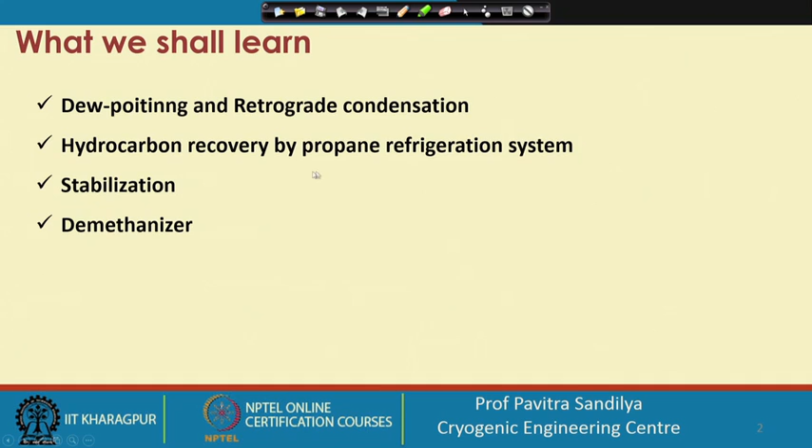Welcome. After learning about liquefaction and refrigeration, now we go on to learn the applications of these processes for natural gas processing. In this lecture, we shall be looking at the hydrocarbon recovery in natural gas systems. We shall be learning about dew pointing, hydrocarbon recovery by propane refrigeration, stabilization and the demethanizer.

So, let us first see why we need this recovery of the hydrocarbons. We know that the pipeline grade natural gas, the sale gas, has to meet some stipulated heating value, and it has been found that without dilution by nitrogen or carbon dioxide, the heating value is quite high compared to the stipulated value, because any kind of hydrocarbons can be burnt, and their combustion generates lots of heat.

So, hydrocarbon recovery is done to lower the heating value, what we call fuel conditioning. We have to take out those other hydrocarbons, so that we have mainly methane, and the heating value stays within the limit.

It is also done to produce valuable liquid hydrocarbon products; the recovered hydrocarbons are not thrown out, they are used to make other products. Many kinds of polymers are made, for example PVC, which we use in our day-to-day life. So, natural gas provides a very good source of hydrocarbons, which are raw materials for other commercial products.

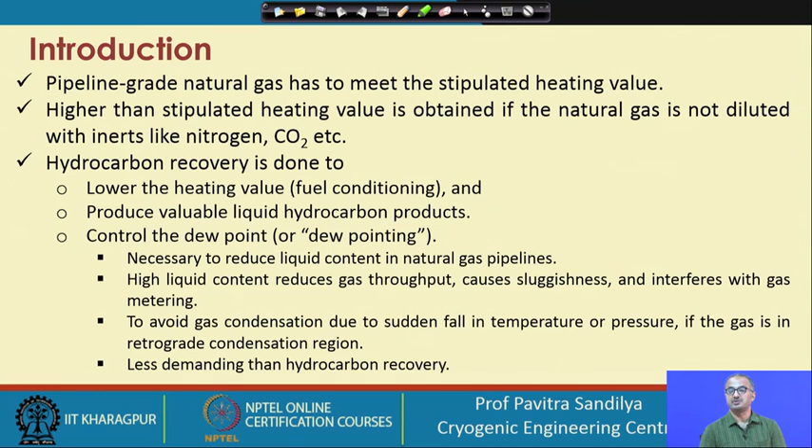This is also done to avoid gas condensation due to a sudden fall in temperature or pressure if the gas is in the retrograde condensation region, which we learnt earlier. To avoid this condensation, we do not want to go into the retrograde condensation region, so we need to adjust the dew point, and it is less demanding than hydrocarbon recovery. It is not as costly as recovering the hydrocarbons, so we generally do dew pointing.

Now, let us look at retrograde condensation. We saw this curve earlier, and it is very peculiar for natural gas. This is a typical retrograde pressure-temperature equilibrium curve for natural gas, and it will differ for different natural gases depending on composition.

Here we have three points A, B, C. A is the cricondentherm, the highest temperature below which we get two phases and above which we will not, whatever changes we make with pressure and temperature. In this region, even if we keep reducing the temperature or increasing the pressure, we will not get two phases.

B is the cricondenbar, the highest pressure below which we have two phases and above which we have only a single phase. C is the critical point, and in these regions we will have a single phase, either liquid or vapor.

Okay, only within this particular region, which is given by this particular envelope, we are getting the two-phase region, and this particular dashed line shows the curve for a given quality, that is, the amount of vapor in the total mixture. So, as the pressure drops along the vertical dashed line, liquid phase forms until the pressure is below the envelope.

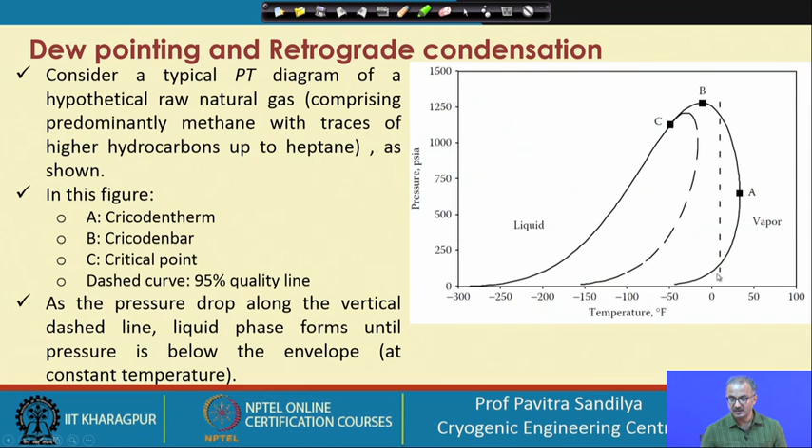So, this is the peculiarity. Suppose we look at the cricondentherm of the 95% quality curve. This cricondentherm is about 50 degrees Fahrenheit, 30 degrees centigrade, lower than that of the original mixture. So the cricondentherm for this curve is lower than the cricondentherm for the 100% quality line. This difference is about 30 degrees centigrade, and only 5% is condensing. That means a small condensation leads to a large difference in the cricondentherm.

And the cricondentherm depends strongly on the molecular weight and less on the concentration. If we have higher hydrocarbons, they will have one cricondentherm, and lower hydrocarbons another. It does not matter how much of those hydrocarbons are there, but how heavy they are. For example, methane containing about 10 mole% of propane has a cricondentherm comparable to methane containing 0.06 mole% of heptane.

Heptane is much heavier than propane. Heptane is C7H16, and propane is C3H8. So even if heptane is present in a very small amount and propane in a very large amount, the cricondentherm seems to be almost the same. So it is the molecular weight which determines the cricondentherm more than the concentration. That is why it is important for us to closely monitor the amount of heavier hydrocarbons present in the natural gas.

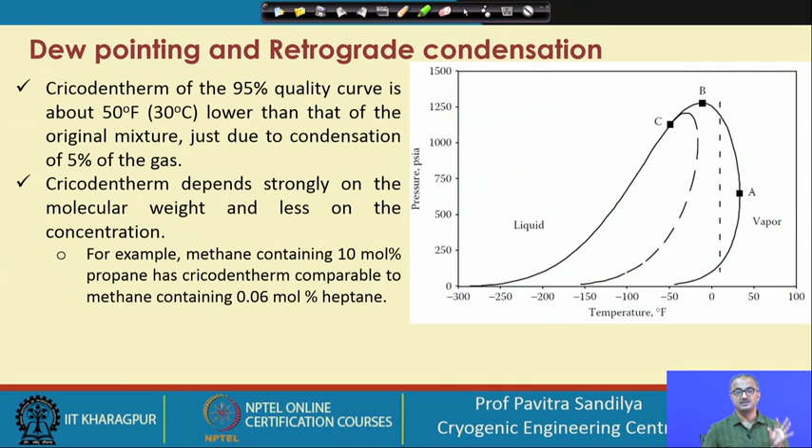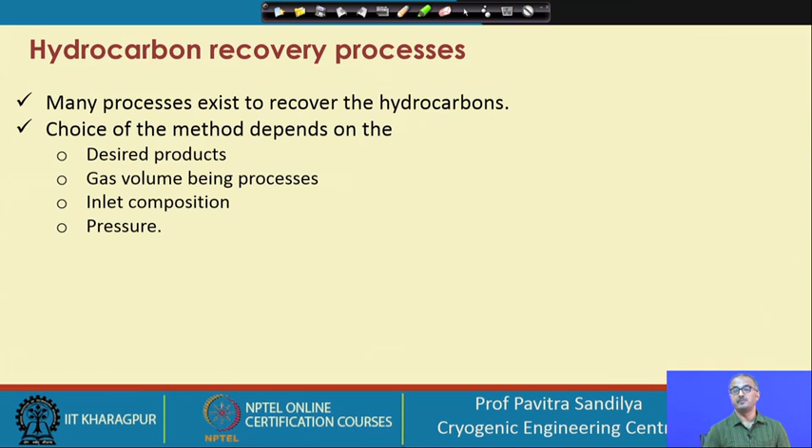Now, we come to the hydrocarbon recovery processes. There are many processes to recover the hydrocarbons, and the selection of the process would depend on the desired products, the amount of gas being processed, the inlet composition of the gas, and the pressure. These are the factors which determine the selection of a particular process for recovery of the hydrocarbons.

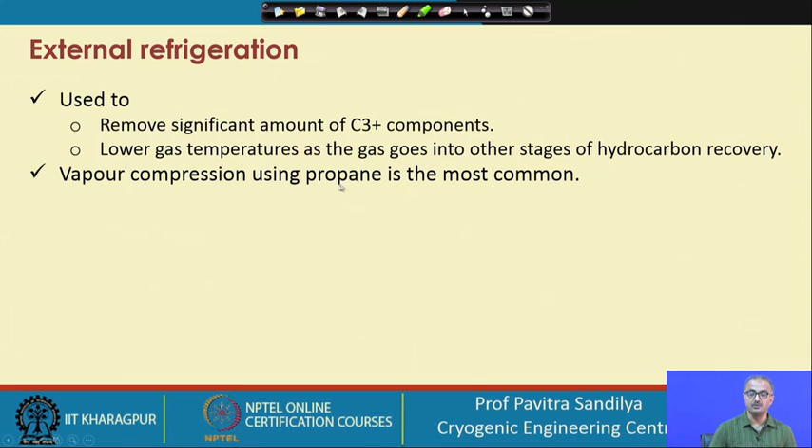One way is external refrigeration, used to remove a significant amount of C3+ components, meaning propane and higher components. External refrigeration also lowers gas temperatures as the gas goes into the other stage of hydrocarbon recovery. Vapor compression using propane is the most common, and we shall be discussing this vapor compression cycle using propane.

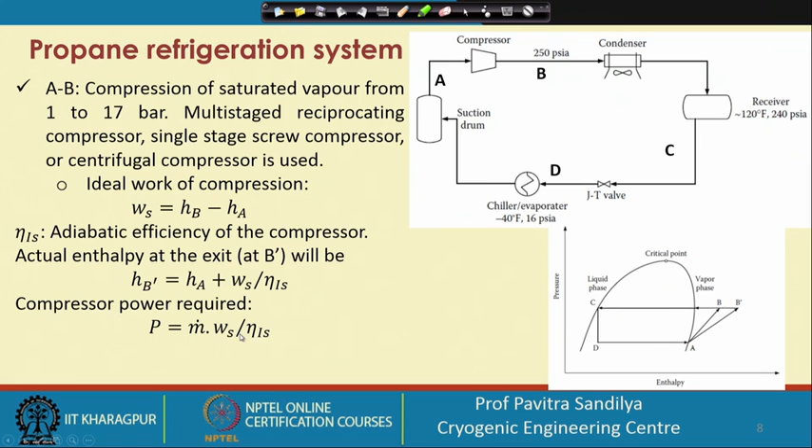And as I said, if eta IS is the adiabatic efficiency of the compressor, then we get this particular expression. That means instead of B, we shall be reaching B prime, and this expression is obtained from this one: HB prime is equal to HA plus WS by eta IS. Okay. And then we have the compressor power required. We can obtain this simply by multiplying the flow rate of the gas being processed with the actual work done. Okay. For an ideal compressor, this one will be unity.

Now coming from point B to C, or B prime to C. From B prime to C, we are going from here to here. Okay, in this condenser we are condensing the propane, and by condensation, the heat is being released. Okay, and this heat is released and put into some suitable sink. So that is how we are rejecting the heat from the system, and it is happening at around 38 degrees centigrade.

And whatever heat is being generated due to condensation of the propane is taken out either by an air cooled or water cooled condenser. So we are simply using air or water to take out the heat of condensation from this propane, and the condenser load is the difference between the enthalpies. Okay, this is quite simple.

Then coming from C to D. Now this condensed liquid is being expanded through a JT valve. Okay, and this expansion is done to about 1 atmosphere, and this JT valve results in cooling to about minus 40 degrees centigrade. Now in this cooling from C to D, we are within this particular dome, and here we are getting two phases. That means we have liquid as well as vapor. Okay, and we are getting a good amount of cooling.

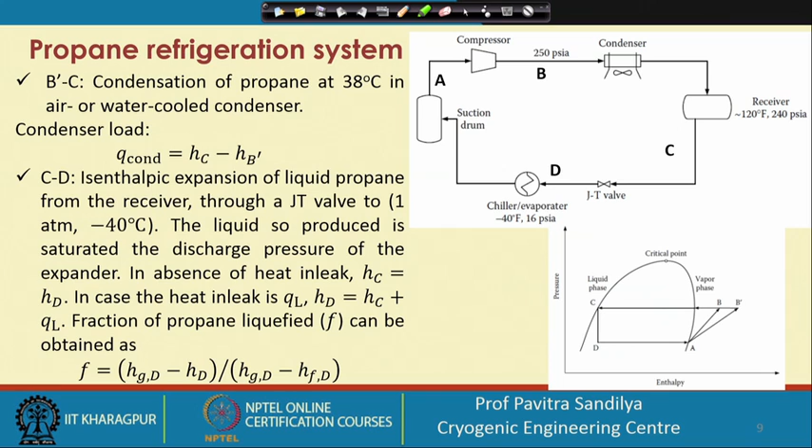And if we want to find out the fraction of the mole liquefied, we can use this particular thing. This is very simple. This is coming from the expression of the overall enthalpy of the system, which is obtained from the enthalpies of the saturated vapor and the saturated liquid. So from that expression, which we often use in thermodynamics, we are getting the amount of propane liquefied, because there are two phases.

So generally the vapor leaves the chiller. That means we are using a chiller or evaporator. Now, this vapor leaves the chiller, assuming that it is saturated vapor, with HA, because we are going to compress the vapor. So if we assume it is saturated vapor, then HA will be replacing this HGD, and we are getting the fraction liquefied.

Okay. Now, from D to A, we are evaporating the cold propane in the chiller. Okay. The vapor portion cools down to the saturated state by sensible heat transfer. The saturated vapor becomes saturated liquid, and since sensible heat transfer is much smaller than latent heat transfer, the propane temperature remains almost constant.

So even though this two-phase region was there, the vapor will first come to the saturated vapor state from the superheated, then it will be transforming to saturated liquid. And because sensible heat transfer is generally less than the latent heat transfer, which is quite high, we can neglect the sensible heat part, and for practical purposes we take the temperature to be constant, because there is a simple phase change. And the propane returns to the compressor suction at slightly above minus 40 degrees centigrade, and the heat removed is HA minus HD.

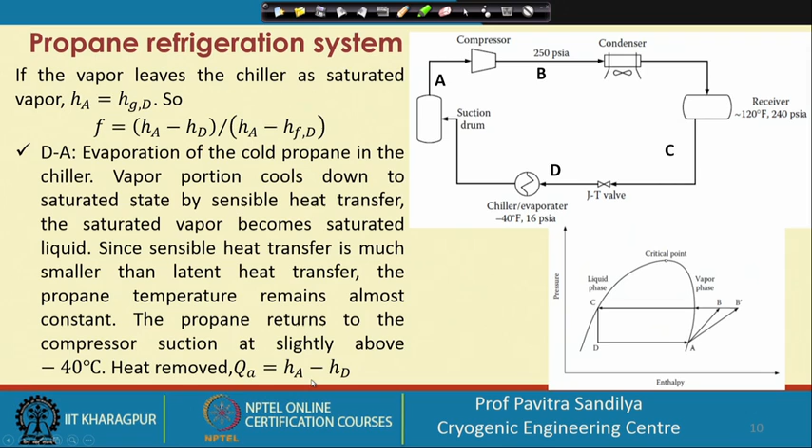Now, after figuring out all these values, we can easily find out the coefficient of performance of this system, and we find this is QA by WS. We put the values of QA and WS, and we find this is COP, and this can also be put in terms of the amount of fraction liquefied.

Now, let us see the effect of process variables on refrigeration. First, let us look at the condenser outlet temperature. We find that this condenser outlet is limited by the heat removed in the condenser. How much heat can be removed will determine it, because we are using either water or air to remove the heat in the condenser. So, it will depend on at what temperature the water or the air is coming, and we know that this particular temperature will dictate the compressor discharge pressure, because the enthalpy will be dictated by how much heat is being recovered.

And we know that the temperature of the ambient changes from season to season, and also at different points in the day. So, if that changes, the temperature of the air will also change, and if they change, then what will happen? It will also change the condensation temperature. So, all these things will ultimately affect the performance of the refrigeration system.

And here in this particular table, we are showing typical values for the condensation temperature, the change in the compressor duty and change in the condenser duty. So, we find that if the temperature of condensation is changing, how the compressor duty and the condenser duty are changing. This is the base value we have considered, 38 degrees centigrade, and beyond this is less than 38 degrees centigrade, and this is higher than 38 centigrade.

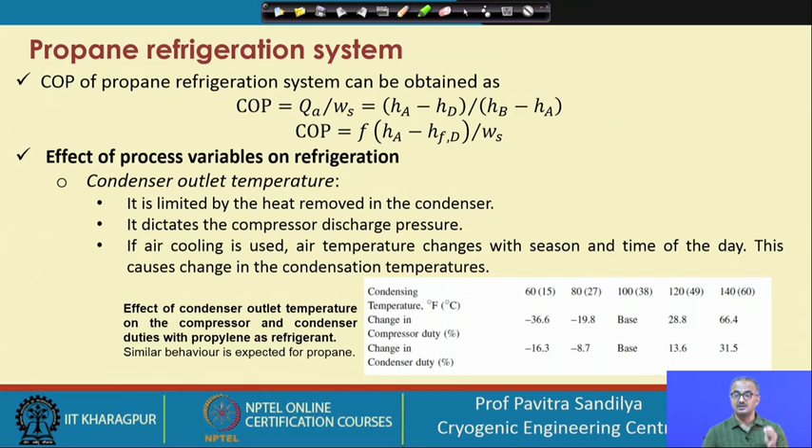Now, we find that with the change, the condenser duty is changing less than the compressor duty. So that clearly shows that the work requirement changes more than the condenser duty, that is, how much heat is rejected. That is why it is important, because ultimately we are concerned with the work requirement. So, it is important for us to know the temperature of condensation.

And next is the purity of the refrigerant, because both light and heavy ends may be present, and propane generally contains a small amount of ethane, which may accumulate in the propane receiver, thereby increasing the condensation temperature. Because the ethane will not be condensing at the temperature at which propane condenses, since ethane has a lower boiling point, and if it does not condense, it keeps accumulating, and it will act as a non-condensable.

Then what will happen? It will slowly raise the pressure inside the system, and if pressure is getting raised, the temperature of condensation will also get affected, and it will also rise. Heavier ends like butane, compressor oil, etc. may be present and are removed periodically by heating with hot propane from the compressor discharge.

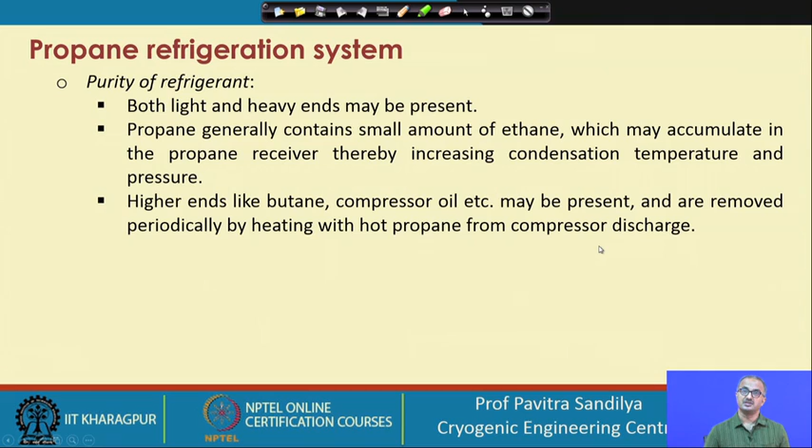So we are talking about only the propane refrigerant, and the propane is generated internally from this system only. That is why it will not be pure propane, it will be having some kind of impurities. So those impurities should ideally be removed before we carry on this kind of process.

Next we look at some modifications. What is the motivation for this modification? That compressor work is minimized if heat is removed at the highest temperature from the chiller. This is given by thermodynamics: the higher the temperature for removing the heat, the less will be the compressor work.

And how is it implemented? It is implemented by multi-staging of the compressor to reduce the work per unit amount of refrigeration duty. This is similar to cascade refrigeration, which we learnt earlier, and the optimum number of stages has to be chosen to maximize the benefit. So how many stages? Because this kind of compression is done in multi-staging, there will be an optimum number of stages to maximize the benefit of the reduction in the overall work done.

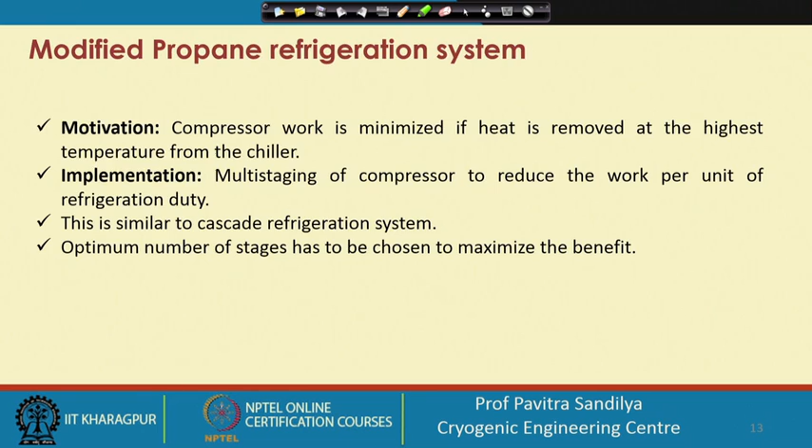Next we come to stabilization. And why is it done? It is done to recover the lighter hydrocarbons for fuel or sales gas from the liquid byproduct that contains a substantial amount of the lighter components. That means whenever we have the heavier components coming out, some lighter components like methane and ethane will also be there. We do not want to pass this methane with the higher hydrocarbons, because methane will be used in the natural gas.

So whatever last amount of methane or ethane is remaining, we want to take it out of these higher hydrocarbons. That is why we call it stabilization, and this will also make the storage of liquid easier. Why? Because if we have the lower hydrocarbons, it is difficult to liquefy them.

Okay, so that is why, because the lighter hydrocarbons will lower the dew point. So it will be difficult to liquefy them. So that is why we also need to take out these lighter hydrocarbons to raise the dew point. And you know that by liquefying it, we can reduce the storage space for a given mass.

And in this case, what happens? Feed liquid is passed through a packed bed or a tray column from the top without any reflux. So it is not exactly like distillation. It is more like the stripping section, in which the feed comes from the top and goes out from the bottom, and we are not using any kind of reflux usually.

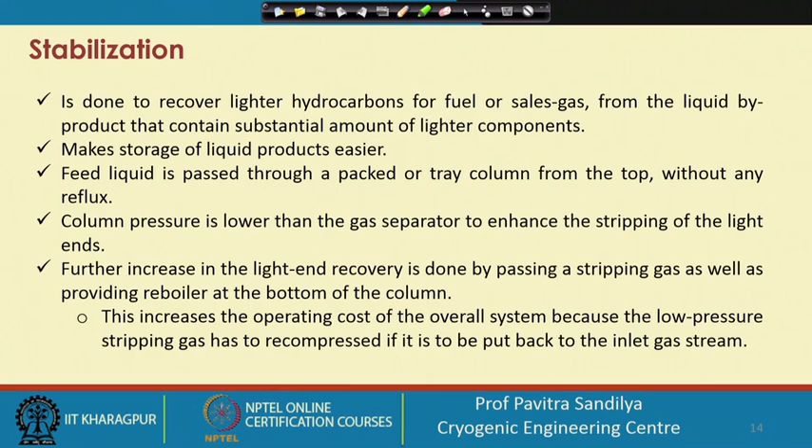The typical methane content at the bottom is about 0.5 volume % of ethane on a C3 plus free basis. So this is the way we report it, as a fraction of the ethane that is present in the bottom product. And feed may be from a turbo expander, JT valve or heat exchanger, which I was telling you about.

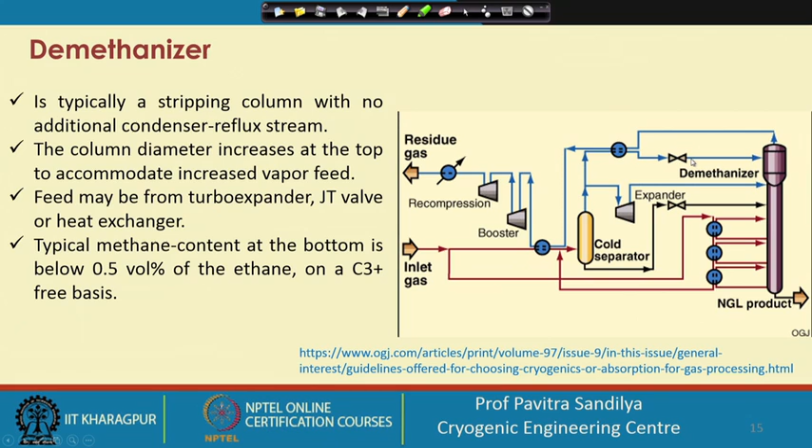The pressure and temperature at the top is about 14 to 28 bar gauge and about minus 115 to minus 110 degrees centigrade. So you can see it is quite low pressure. And there are multiple liquid feeds that come from low temperature separators. We have this one feed, second feed and third feed. They are coming to the system, and multiple side reboilers are used, like here. And why are they used? So that we can recover some of the refrigeration available in warming up the NGL stream.